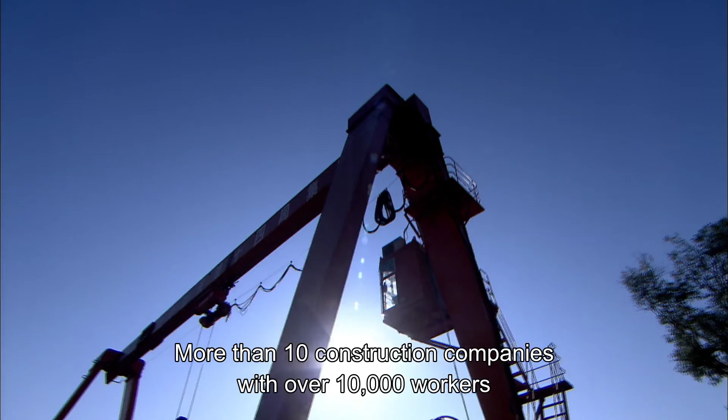In many cities around the world, a subway network will take close to a century to complete. But Beijing's goal is to complete its subway network within 10 years. How are they going to take on this mega project? More than 10 construction companies with over 10,000 workers are working their excavators around the clock. In 2011 alone, 7 new subway lines were being constructed at the same time.

But digging tunnels hundreds of kilometers in length and building hundreds of new subway stations at the same time is not going to be easy. In many big cities, the subway system usually predates the city or grows with it. This gives the subway system a lot of room to develop. But the city of Beijing went from being an ancient city hundreds of years old to a modern megalopolis. There is an intricate network of underground pipes and building foundations underneath the city. Constructing a huge subway network through all of this is going to be a real challenge.

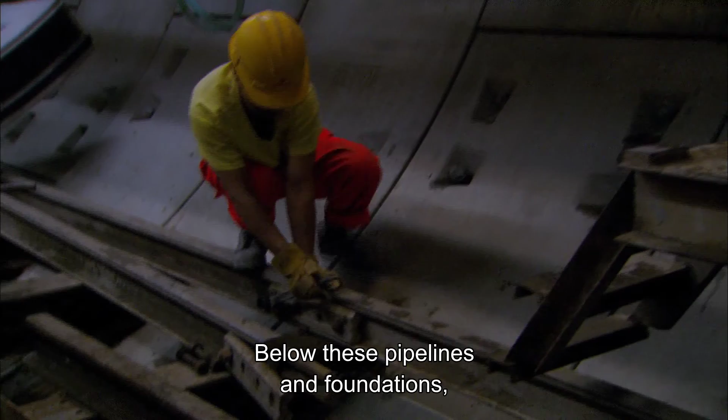Below these pipelines and foundations, workers are building a new subway line. This line will run from east to west, straight through the center of Beijing. This presents an interesting problem for the architects. The most important thing to consider is the fact that there are many ancient foundations below ground. Beijing is an ancient city. The historical streets and quaint alleyways of the city have been revamped with new sights and sounds. For the average tourist, this is old Beijing at its most authentic. The new subway line will be built right under here. How are the engineers going to deal with these fragile old buildings?

Originally, the 6th line was supposed to pass through the imperial city in the center. But after considering the opinions of experts, we've decided to shift the subway line north by 1.5 kilometers. This is so as to preserve the imperial city. But adjusting one part of a subway line alone is not enough to ensure the safety of these ancient buildings. The construction methods used in this project play an important factor too.

This is the biggest department involved in designing the Beijing subway. The architects are discussing how to construct the subway through the old city. Once a subway line is planned, the architects will spend 3 years here working out the minute details of the line. Then, the new line will move to its construction phase, which can take up to 4 years. Their work will only come into fruition in the future. It takes almost 10 years of work for them to see any results. If you ride a newly opened subway line in 2012, it will most likely have been designed in 2005.

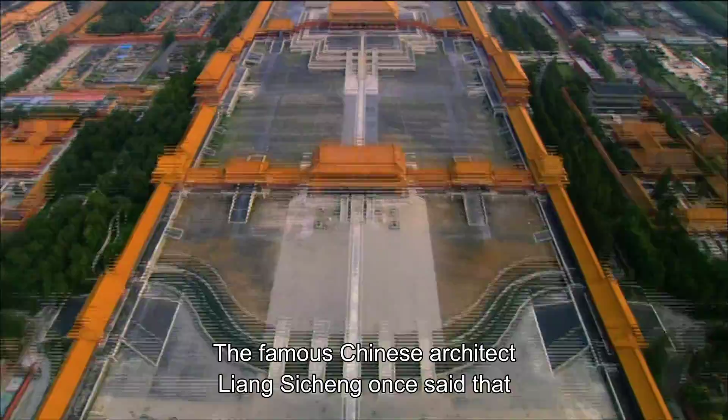Beijing used to be an imperial city. The Yongdingmen and the Drum Tower form a central axis on which the city is strictly planned, reflecting the strict authority of imperial power. The famous Chinese architect Liang Sicheng once said that Beijing's regal beauty comes from its adherence to this axis.

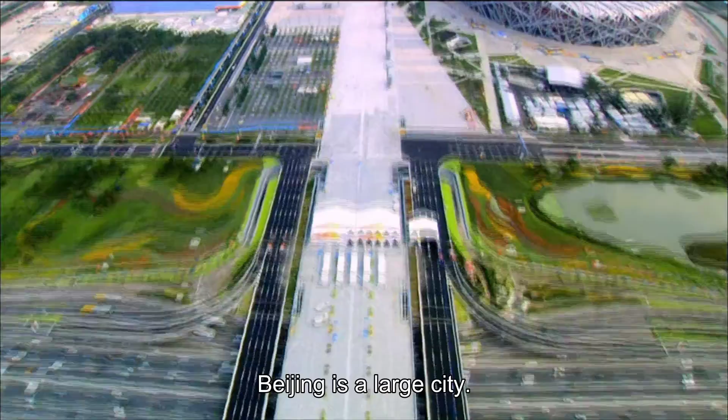Today's Beijing has developed along this structure. It is because the city came before the subway system that the subway is forced to adapt to the city structure. Beijing is a large city. It is very dense too. The subway system must therefore adapt to the way the city has developed, so that it resembles the way the roads are laid out. It basically follows the line of the grid system and the ring roads that surround the city.

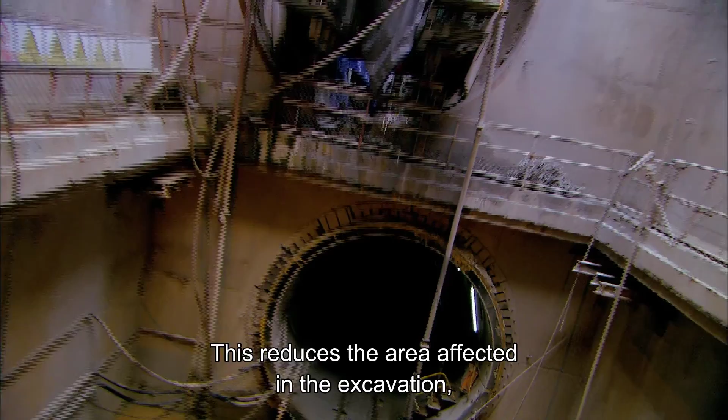In order to better protect the ancient buildings above, the architects have chosen to use a system never before seen in Beijing. When the tunnel diggers run into the ancient foundations of buildings, the tunnels will run on top of one another instead of parallel to each other. This reduces the area affected in the excavation, thus reducing the impact on these ancient foundations. The tunnels are now able to pass through these historical areas safely.

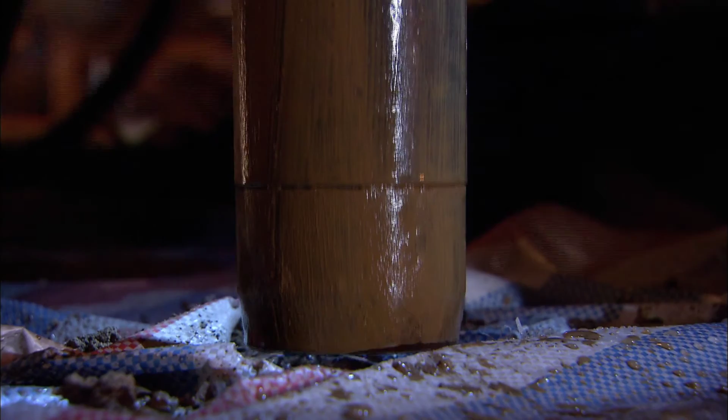On top of this, there is another more important factor to consider: Beijing's soil. In many other places, soil conditions have caused collapses during subway construction. To prevent this from happening in Beijing, the engineers have to study the soil in the city. The soil surveying team works at night to avoid holding up traffic. They are surveying the soil for the new subway lines. They will have to drill a hole 40 meters deep every 50 meters to collect soil samples for analysis back at the laboratory.

Things are going pretty well tonight. The team has successfully extracted their first soil sample, but a large part of the night has gone by, and they still have another 299 holes left to dig. Although this work is tiring and time-consuming, it is absolutely necessary. It provides important reference data for the planning and construction of the subway line.

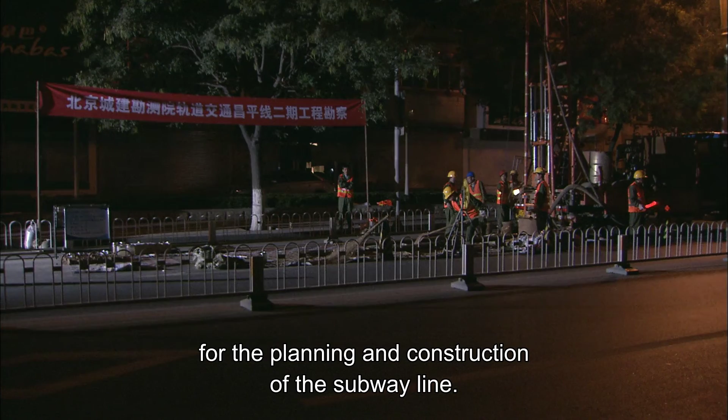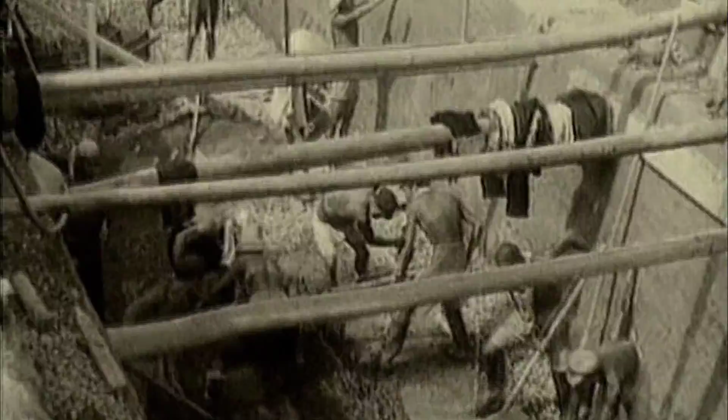In the early 1960s, construction began on the Beijing subway, the first subway system in China. At that time, there weren't many buildings above ground, and the subway line was entirely located 10 meters underground. The tunnels were dug in an open pit entirely by manual labor. No excavators were used at all. This speed of construction would be unacceptable today. Beijing is no longer the city it used to be. Globalization has imposed high standards on the city. The increasingly dense cityscape and congested roads make it absolutely necessary that the subway is constructed quickly.

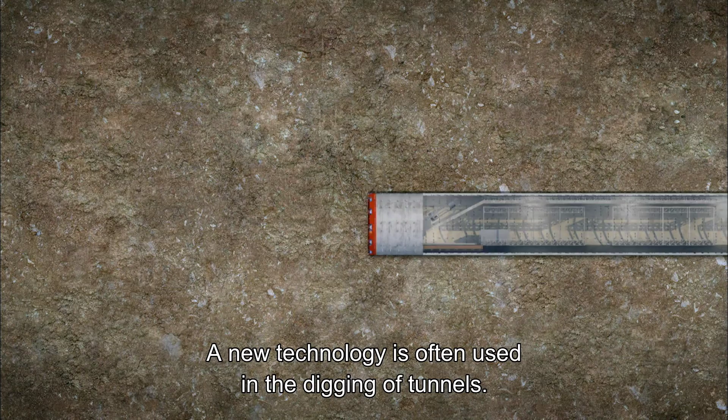A new technology is often used in the digging of tunnels. This machine is many times faster than manual labor. This is the tunnel boring machine. A rotating cutting wheel is located at the front end of the machine. It sends the excavated soil to a chamber where the soil is mixed with slurry. The mixture is then sent to the back where it is disposed by carriage.

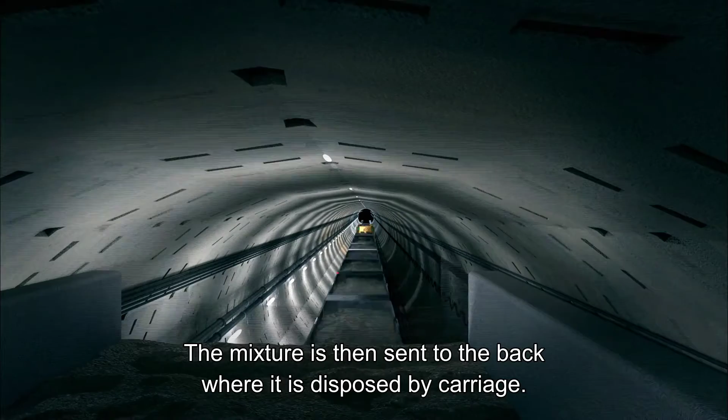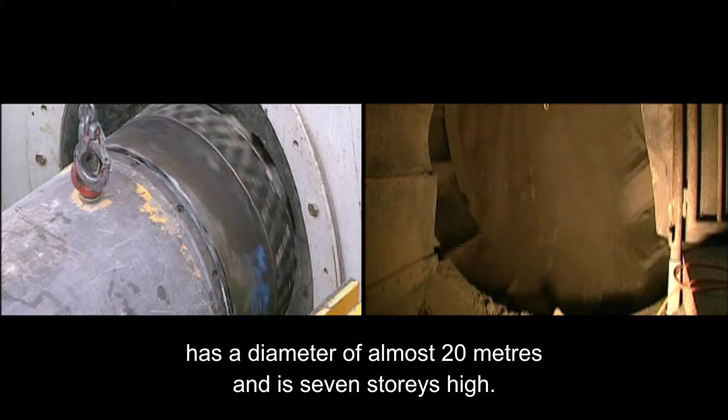The tunnel boring machine is the best machine to excavate tunnels. It is known not only for its speed, but also the size of its cutter head. The biggest tunnel boring machine in the world has a diameter of almost 20 meters and is 7 stories high. Naturally, it is not an easy task to get such a gargantuan machine underground.

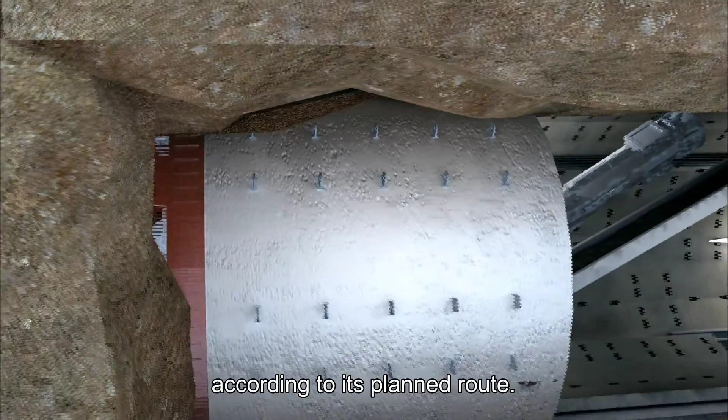Ruixuan Gao is the fastest tunnel boring machine operator in China. His job is to operate the machine continuously 13 hours a day according to its planned route. There is no room for mistakes. This is a complex and tedious job. All I do every day is sit in the control room of the tunnel boring machine. The room is about 1.2 square meters. The only sound I hear is the rumble of the digging. It gets really stuffy in here.

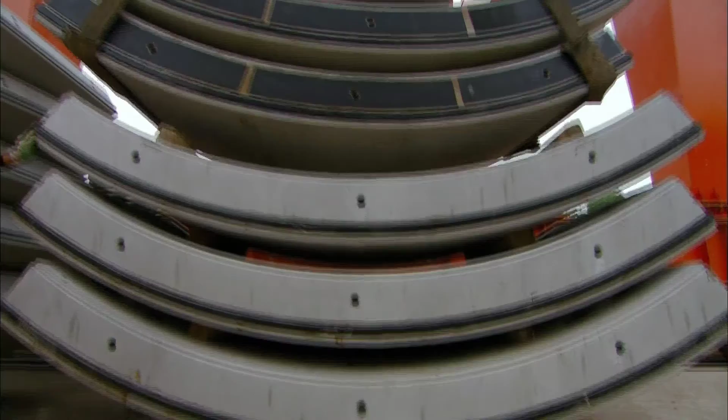Because I spend 12 to 13 hours underground every day, sometimes I don't get to see the sun at all for months. Around me, nothing changes. The only way I know that I'm moving forward is by pushing buttons and seeing the numbers move. The only time Ruixuan Gao gets to rest is when the workers connect the tunnel lining. Every 1.2 meters, the machine will stop so that the workers can install the tunnel walls.

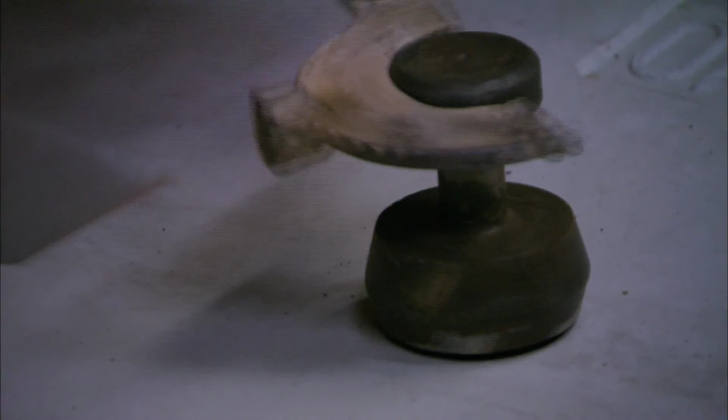There are usually 6 segments to the tunnel wall. These segments differ in size and have different connecting points. The workers have to carefully piece them together to ensure that they fit snugly with each other. As the tunnel boring machine moves forward, the wall of the tunnel is completed at the same time.

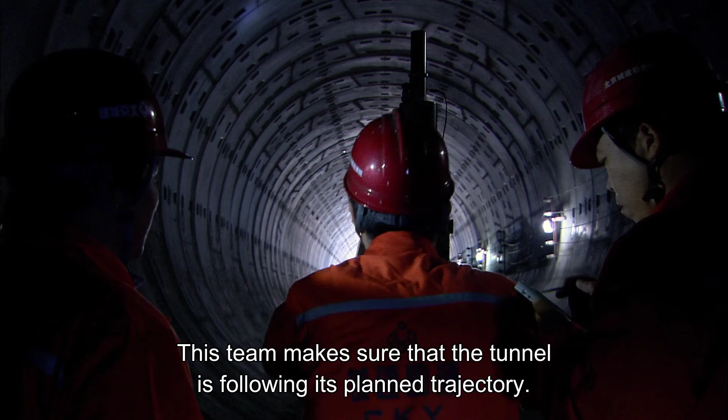When the wall of the tunnel is finished, another team begins its job. This team makes sure that the tunnel is following its planned trajectory. This is important in making sure that the tunnel boring machine emerges at the right place.

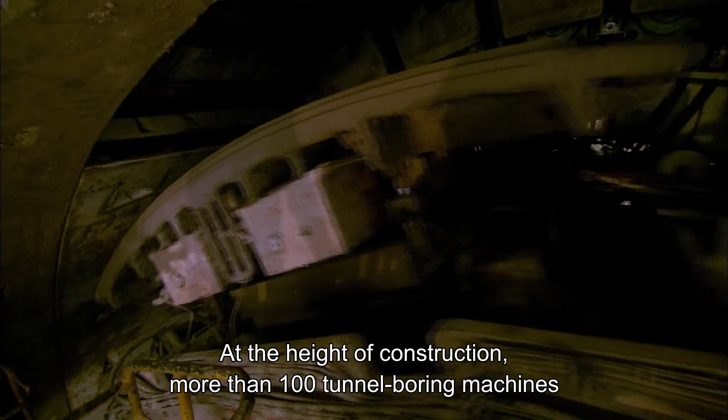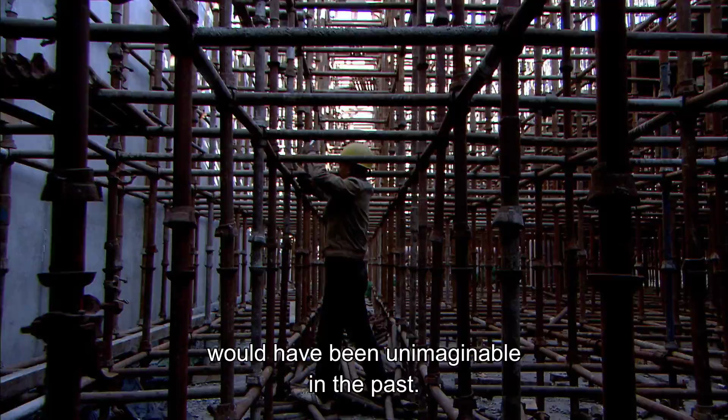The tunnel boring machine is necessary to ensure the largest subway network ever built is finished in 10 years. At the height of construction, more than 100 tunnel boring machines are working underground at any one time. Each one of these machines costs 50 million yuan. Each kilometer of the tunnel costs 1 billion yuan to build. The entire subway network will span over 1,000 kilometers. The costs involved in its construction would have been unimaginable in the past. China's rapid economic development in the past 30 years has allowed Beijing to undertake a mega project like this.

Beijing is developing at an astonishing pace. Its traffic situation, though, leaves much to be desired. As the roads get more and more congested every day, bad traffic is becoming a major problem in people's lives. The city planners of Beijing need to step up their game.

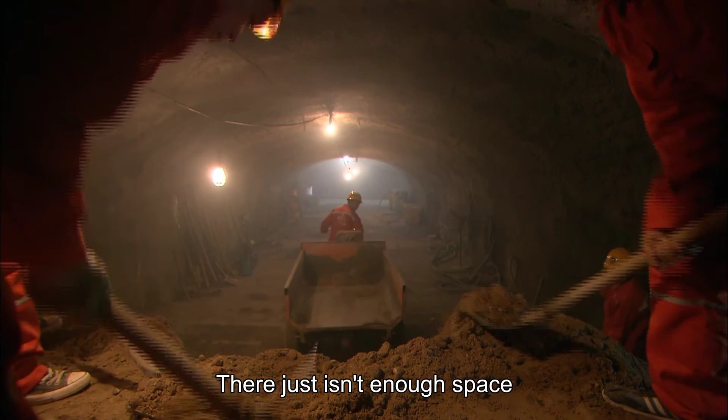The tunnel section near Military Museum Station on Line 9 is still being dug the old way, by manual labor. It takes 18 months for the workers to construct 1 kilometer of tunnel. The tunnel boring machine would have only taken 3 months, but this can't be helped. There just isn't enough space for the tunnel boring machine to go underground here.

The newly constructed Military Museum Station is located along the busiest section of Chang'an Avenue. A huge pit would have to be excavated for the tunnel boring machine to go underground. This would have been impossible on a busy road like this. Line 9 is scheduled to open at the end of 2012. The only way for this to happen is for the workers to work faster.

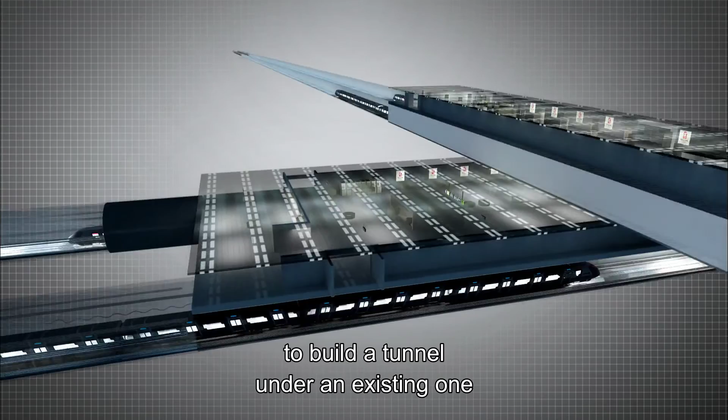There is yet another problem to be solved here. Line 9 has to cross under the existing Line 1. In subway construction, to build a tunnel under an existing one is the most dangerous thing to do. However, this is not the only problem for this new station.

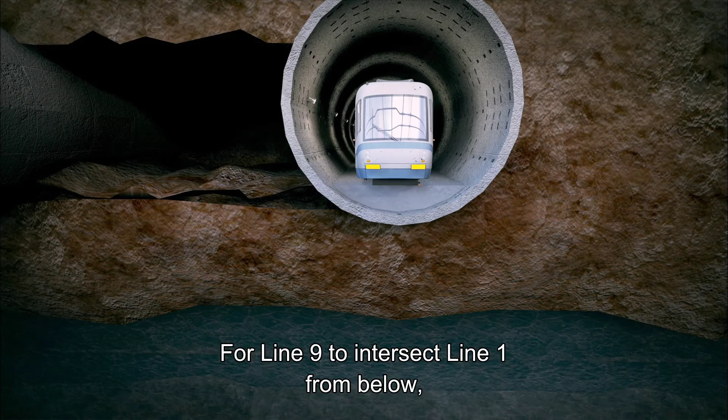Under the new subway plan, Line 9 will intersect with Line 1 with a new Military Museum Station serving as an interchange station. Line 1 was built close to the surface, and so the new line will have to be built under it. But the problem is that under Line 1 there is a large layer of water. For Line 9 to intersect Line 1 from below, the new station would have to be built in this layer of water.

It's a nightmare to carry out construction in an underground body of water. The water could lead to collapses any time. The workers will have to drain this water before they can begin work. It takes 2 whole months to drain the water. When the workers examine the water level again, they discover that it has not dropped significantly. This adds another level of difficulty to an already difficult project.

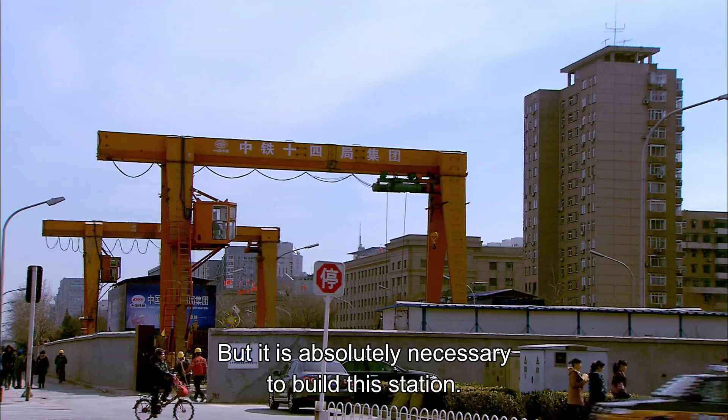But it is absolutely necessary to build this station. 1 kilometer away from it is the largest railway station in Asia, Beijing West Station. The volume of passengers it receives per day is one of the biggest in China. However, not a single subway line goes to this station. Because of this, it has long been one of the most congested areas in the city.

The Military Museum Station on Line 9 will connect with the Beijing West Station, allowing passengers to also change to other lines. This will help to ease congestion around the Beijing West Station. But there still doesn't seem to be a solution for the Military Museum Station. The engineers are stumped.

At the other end of the city, the tunnel boring machine operator Wu Xuangao has also run into a problem. The tunnel boring machine has to face a new challenge. The longest time we've spent down here is 26 hours. We've only bored 10 centimeters so far. The reason the boring machine lost its power lies in the complex soil structure of Beijing.

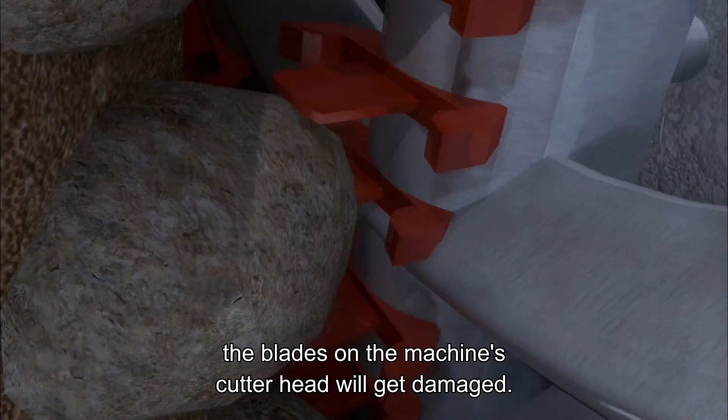The east and west ends of Beijing are slightly elevated. Because of the sediments deposited by the rivers, the soil on the east side of Beijing is sandy, while that on the west side is rocky. Tunnel boring machines do not deal well with hard, rocky soil. The big boulders in the soil turn along with the machine's cutter head, making it impossible for the machine to advance forward. If forced to push forward, the blades on the machine's cutter head will get damaged. The soil structure is a problem for tunnel boring machines around the world.

As traffic gets worse every day, the pressure to finish the project on time weighs down on everyone. This means that Wu Xuangao is forced to stay in the tunnel for even longer periods of time. Every moment underground now frays his nerves. Every time I go in there, I get so annoyed. Every time I hear the rumble of the machine, I ask myself, what am I doing in here? Why don't I just pack up my stuff and go home?

At 5 o'clock in the morning, the first subway trains leave the depot after making their preparations. They are getting ready to set out on their day ahead. A new day has begun. The subway trains begin their 18-hour workday.

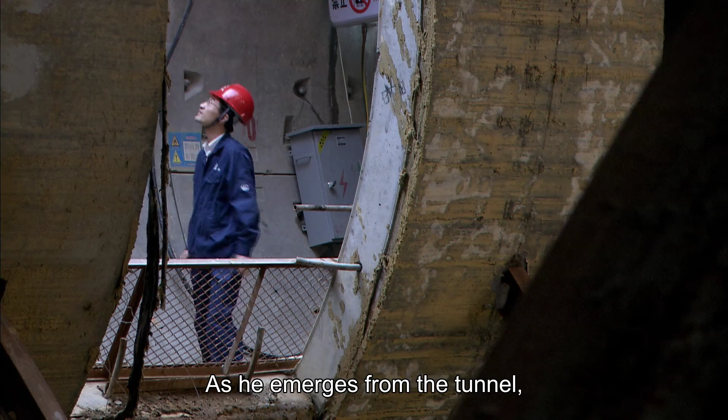Only now does Wu Xuangao get off work and see the light of day. As he emerges from the tunnel, he realizes that the moment he walks out of the tunnel every morning is the happiest moment of his day. He receives texts from his friends and family from far away and feels the first rays of the morning sun on his face.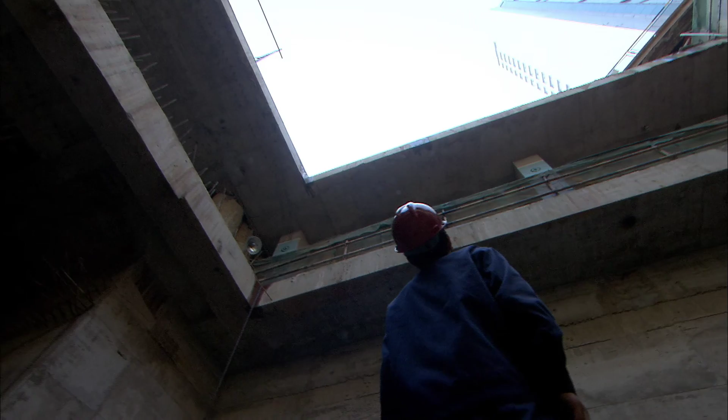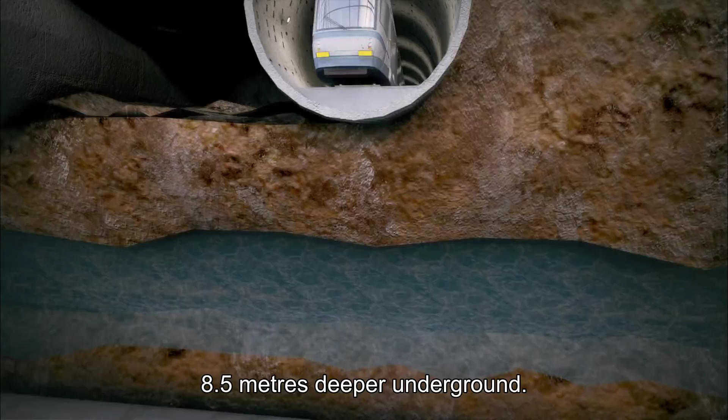After many rounds of discussion, the experts finally come up with a bold solution for the military museum station. 8.5 meters deeper. They have decided to move the new station 8.5 meters deeper underground. They will now bore deeper to build the new station below the body of water.

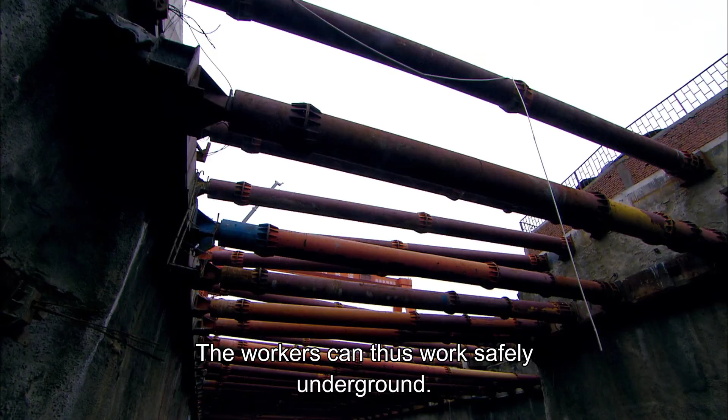There are two ways of constructing the tunnels for the subway: the trench method and the trenchless method. The trench method requires many steel beams for support. The workers can thus work safely underground. But the drawback to this method is that it generates widespread disruption on the surface level. Because the subway lines run close to the road system, using the trench method would only paralyze Beijing's traffic further.

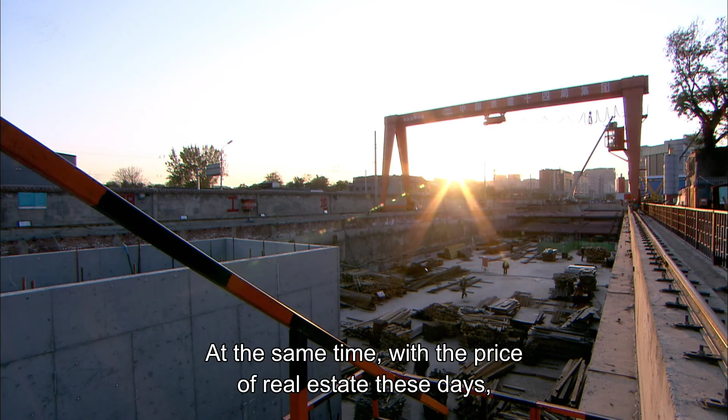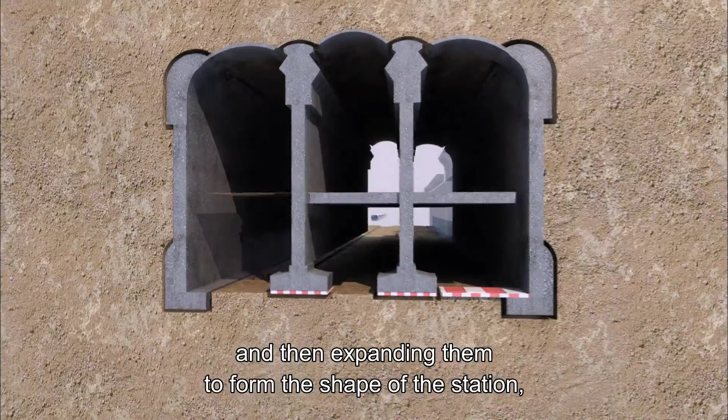At the same time, with the price of real estate these days, removing and transporting soil would cost an astronomical amount of money. So in light of this, a new method was invented. This new method is called the trenchless method. It involves boring a few small tunnels underground and then expanding them to form the shape of the station, then getting rid of any unnecessary soil in between. This entire process takes place underground, minimizing surface level disruption.

This is the perfect solution for the military museum station. This method is more difficult and more time-consuming than the trench method, but it is the only solution now. First, a vertical well is drilled deep into the ground. Above them is the layer of water that cannot be drained.

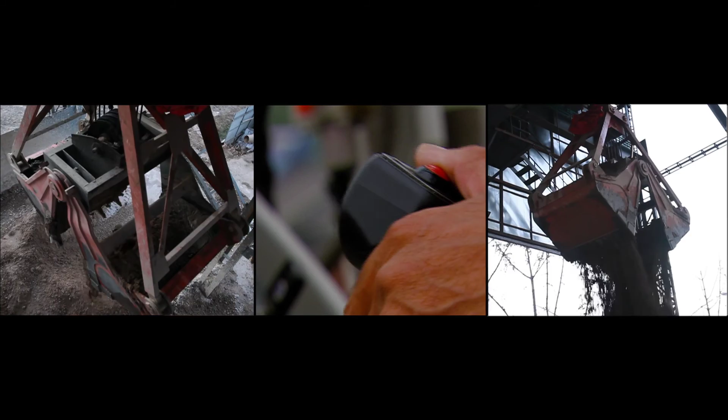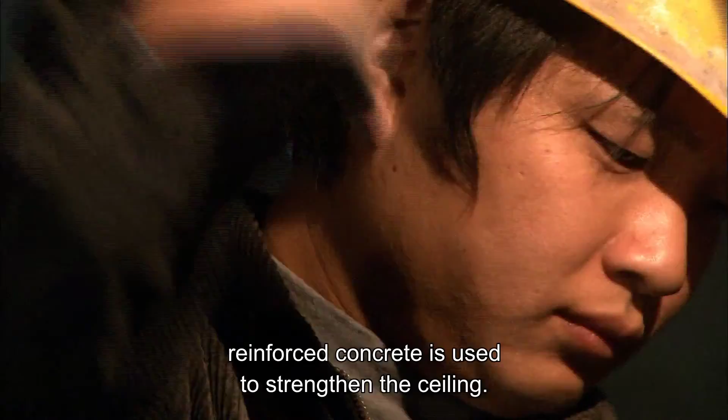There are only 3 meters of ground between them and the water. The engineers need to make sure that this layer of ground doesn't collapse or leak. At every step of the way, reinforced concrete is used to strengthen the ceiling. This will ensure that the workers stay safe. But there is one more factor the engineers need to keep in mind. The subsidence of the ground must not exceed 3 millimeters.

There are strict requirements put in place for the distance between train and tracks. If the ground sinks more than 3 millimeters, the tracks will warp in shape. The trains will then have to reduce their speed when going over these deformed tracks, making the coordination of these intersecting lines a huge mess. 3 millimeters might seem small compared to a project of this scale, but the subway engineers need to always keep this number in mind, because above them lies a 50-year-old subway line, Line 1.

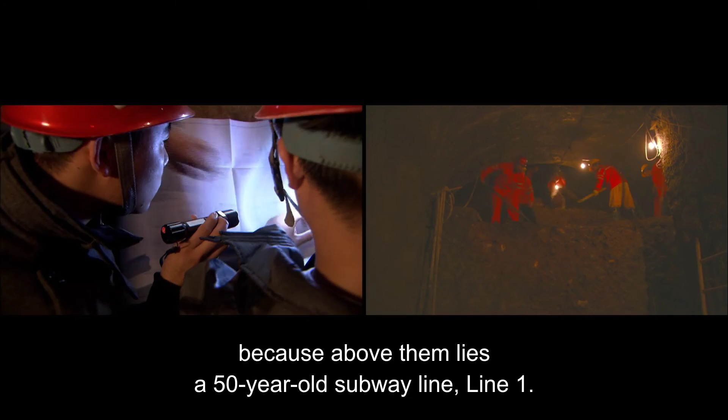Line 1 was the very first subway line in Beijing. Today, it is one of the main transport lines of the city. Over 1 million commuters use this line every day. Above this line is Chang'an Avenue, in the middle of which is Tiananmen Square, the heart of Beijing and a special symbol for the people of the city. There are several stations east and west of Tiananmen on Line 1. On public holidays, this line gets incredibly crowded. But this line started its life as an asset for civil defense.

In the early days of the People's Republic, people either got around Beijing by foot or by rickshaw. The premier at the time, Zhou Enlai, once said that 200 buses is enough to provide transportation for the entire city. The Beijing subway only came into existence because China needed to prepare for war. The Moscow Metro played a big part in the Soviet Union's defense during the Second World War. This inspired the newly formed People's Republic. After 10 years of planning, in 1965, Beijing started construction on the first subway system in China.

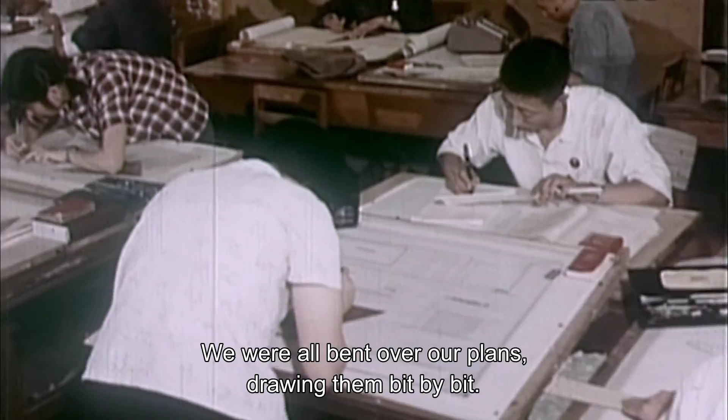But the construction of the subway was arduous and fraught with difficulties. We designed the whole subway system in less than half a year. We were so nervous at the time because we had no experience in this and nobody to learn from. We just decided to do it on our own. We were all bent over our plans, drawing them bit by bit. That was during the summer, I remember. It was really hot. We were so afraid that the sweat from our elbows would smudge our plans, so we put towels underneath and continued drawing.

After 4 years of work, Line 1 began operations in 1969. Because the subway was meant primarily for military transport at the time, Line 1 wasn't open to the public. Only invited guests could ride it. It was a much simpler time. The subway stations were known as underground palaces. To build this subway, to build the first subway in China, we worked really hard. I'm very proud of what I've done. Very proud.

Meanwhile, construction on the Metro Museum station is taking place right underneath. A special method is being used to prevent the subsidence of Line 1. This method was used in the construction of the London Underground 20 years before. It prevented Big Ben from leaning on its side.

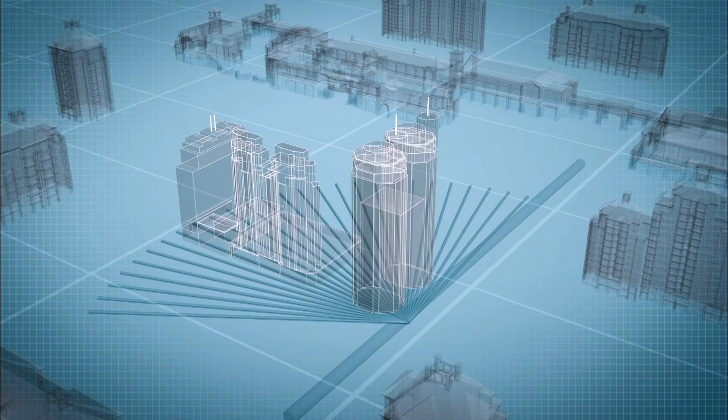If any part of the ground shows signs of subsidence during the building of the tunnel, steel pipes will be inserted to support the ground. Cement will then be pumped through these pipes into the ground to make it more sturdy. Although this helps to mitigate the risks, such a large-scale operation still has its dangers.

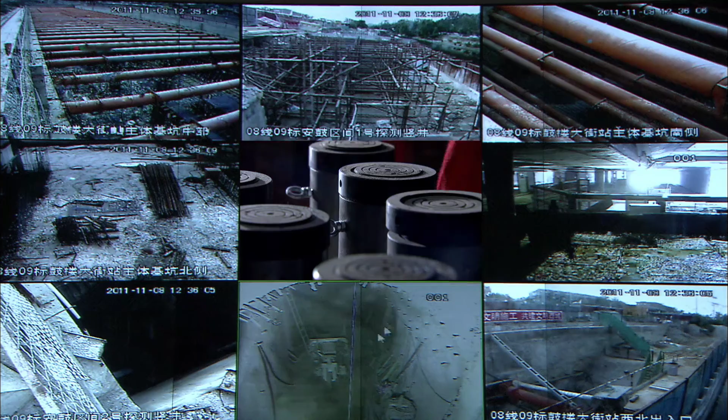Every day, reports on the construction's progress will be sent here. A dedicated team is set in place to monitor the entire construction in real time. Not one problem escapes their eyes. Workers at another line are facing the same problem of building a new line underneath a pre-existing one, but they have decided to use a different method to deal with this.

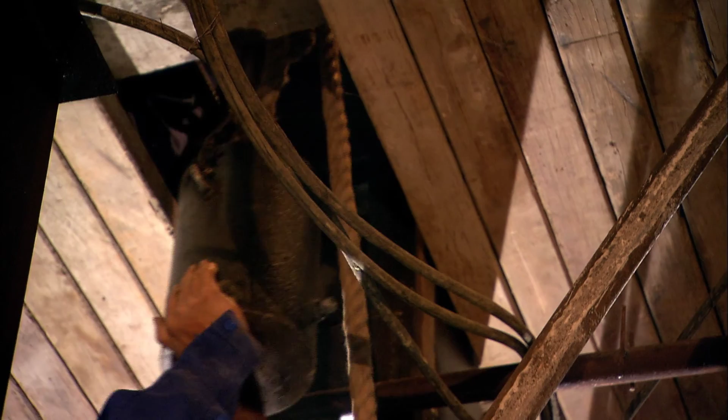This is another station where a new line will intersect an old line. The only difference is that between the two stations, there is neither a layer of water nor ground. They are built close to each other. Right now we're standing in the new Line 10, which is undergoing construction. The steel beams are supporting a concrete base on the ceiling. On top of this base is the operational Line 1.

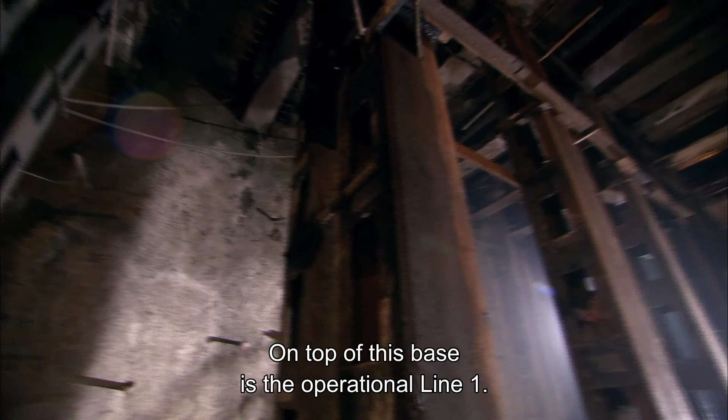Underneath this 40-year-old station, a void is being excavated to make way for the new station. The workers need to make sure there are no disruptions to the operations above and that the ground doesn't sink more than 3 millimeters. Almost everyone involved thinks this is impossible, but engineer Hao believes it will work. His secret weapon is the jack post.

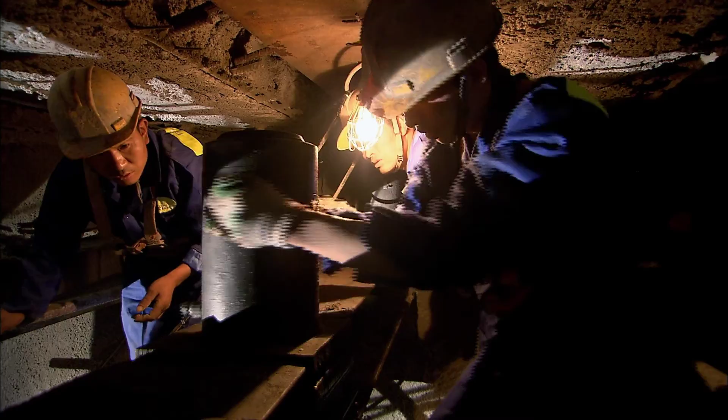Every steel beam is fitted with a jack post on top. It supports the base structure above it. The jack posts are placed on the load-bearing walls and support beams of the new station. They will end up being wedged between the two stations. These jack posts can weigh from 30 kilograms to 90 kilograms. They can bear weight up to 1,600 times their own weight.

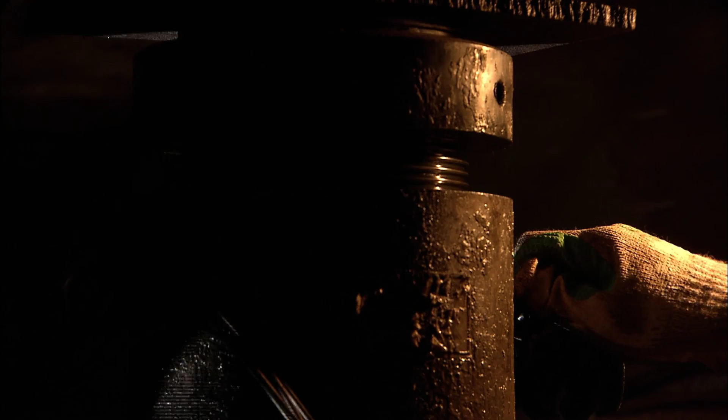The position of each jack post is precisely calculated. They can each be carefully adjusted through a hydraulic cylinder to compensate for any subsidence in the ground. As construction moves forward, the engineers monitor the subsidence of the ground closely. The moment it gets close to 3 millimeters, the workers will increase the pressure on the jack posts. As Rixuan Gao frets over the slowness of the tunnel boring machine, experts are trying to find ways to continue the boring process.

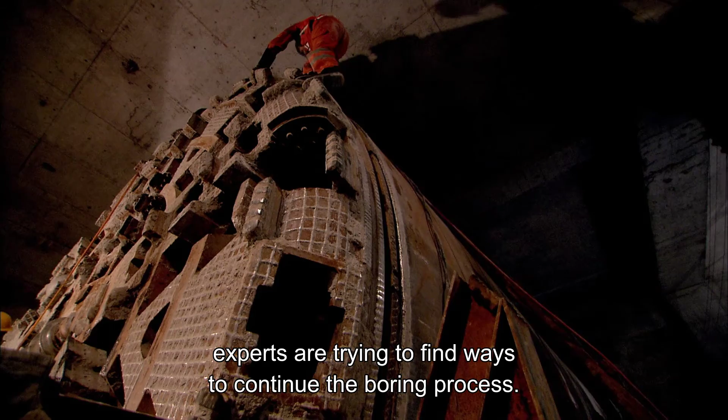This is the second rush hour in Beijing, and it is worse than the first. The average time spent on the road at this time is 2 hours. The subway system during this time is incredibly crowded. Line 5 has 800,000 commuters a day. It is fast approaching its projected ridership numbers for 2031. Traffic congestion is slowly spreading from the city center to its periphery. The road system of Beijing is getting seriously congested.

Beijing's social cohesion and abundant resources are drawing scores of foreigners into the city. There is a large immigrant population here. According to the 6th census, there are close to 20 million residents in Beijing, out of which 7 million are people who are not natively born. 1 in every 3 people here is not a native Beijinger. I collect data for maps. Every day I go all around Beijing collecting data to update existing maps.

Almost every city in China incorporates Chinese tradition in its design. This is especially pronounced in the capital, Beijing. The city is growing vertically day by day, but it is also expanding outwards from a center. Beijing is developing so rapidly. A place that was an empty field just a while ago can suddenly become a skyscraper. In order to include more data about the city in our maps, we have to make our scale smaller and smaller.

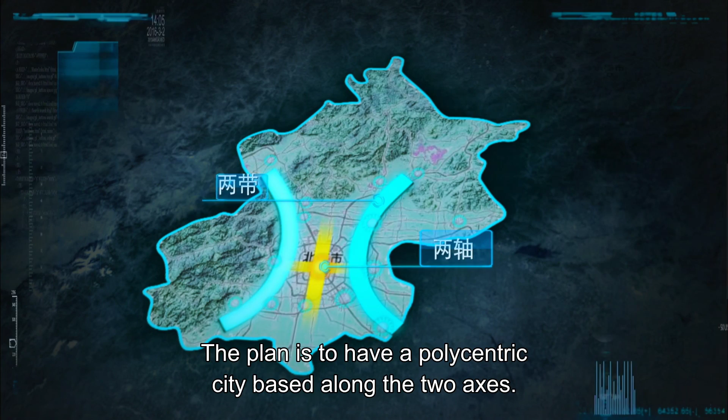A new city plan is being laid out in Beijing. The central axis and Chang'an Avenue form a cross that will act as the core of its new development. At the same time, new centers will be set up in the east and west parts of the city, with new service areas in these districts. The plan is to have a polycentric city based along the two axes.

But Beijing's old city plan has been in existence for a long time. The ring roads surrounding the city have also set its structure in place. The only way to challenge the old city structure is to have a robust rail system.

From the city centre to the new outlying centres, we need to establish express railway systems. The only way to develop these outlying centres is to provide railway access to the city. These new centres will then develop around the train stations along the way. More and more lines are being built to service the outskirts of the city. This is easing the pressure on the city center.

By 2020, the subway network will cover over 1,000 kilometers. This is equivalent to the distance between Beijing and Shanghai. And these rail lines will all be located underground. But will the increasingly dense city accommodate the subway?

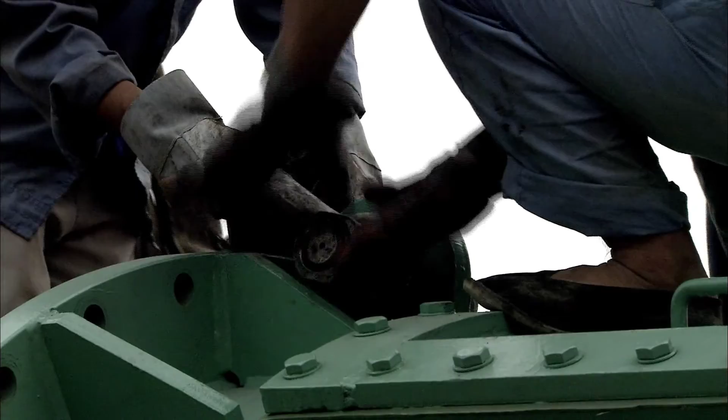This 45-ton, 16-meter-long steel object is a component of a machine. Workers at the Line 14 construction site are assembling China's biggest tunnel boring machine. It has a diameter of 10 meters and is as tall as a 3-story building.

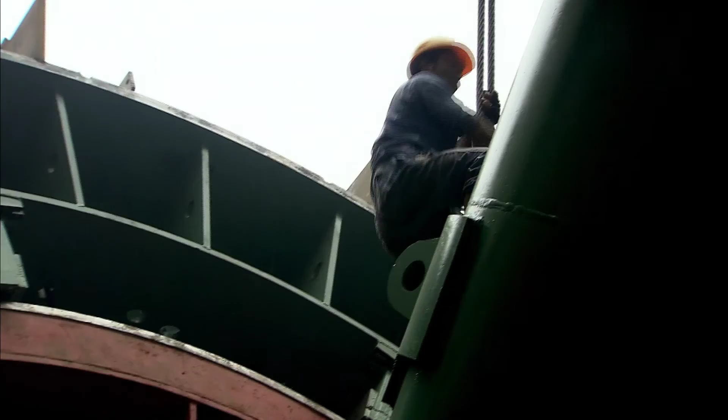For such a big machine to go underground is no easy task at all. All tunnel boring machines have to be dismantled on the ground and reassembled underground from their constituent parts. The size of this machine just means that more time will be spent doing this task. After 6 months, the assembled and tested machine finally begins its work.

Behind the machine is a tunnel with a diameter of 10 meters. Instead of being a traditional single-carriage tunnel, this tunnel can accommodate 2 trains side by side at the same time. This saves precious underground space.

The Beijing subway no longer has just one line. It is now a complex subway network that covers the entire city. With time, this network will only grow bigger. We have reason to believe that this will make the average commute much shorter.

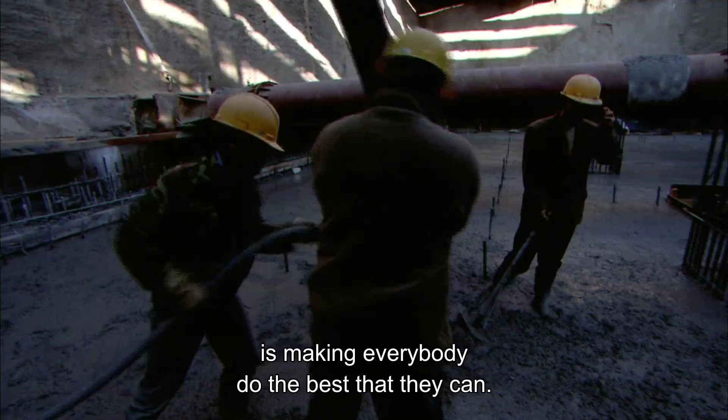In less than 10 years, this massive project will have to be finished. The pressure of time and the pressure from the increasingly congested roads is making everybody do the best that they can. The deadline for the Central Axis Line is fast approaching. The stations on the line are already in their decorating phase. At this moment, the architects are discussing the last details of the plan.

In 2008, the 29th Olympic Games were held in Beijing. 100,000 people gathered in the Beijing National Stadium to watch the opening ceremony. After the ceremony, the sheer amount of people traveling out of the stadium would have caused a huge traffic jam in the city.

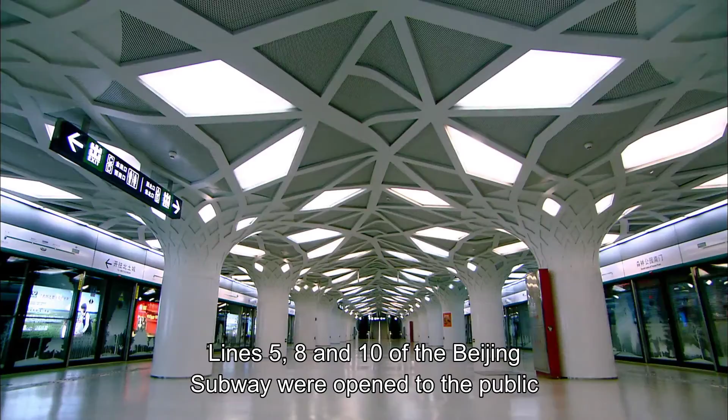Before the opening ceremony, lines 5, 8, and 10 of the Beijing subway were open to the public to better service the Olympic Games. Line 8 is even named the Olympic Branch Line. During this time, the subway system has to sustain an enormous amount of riders, possibly more than it ever has before.

Even then, there is a limit to the number of commuters the subway system can transport. Transporting all the commuters leaving the games is going to be a huge challenge for the subway system. The most viable way is to increase the number of trains to transport all the passengers. Right before the line is about to be open to the public, a new train car is being put to the test. The goal of the test is to reduce the waiting time between trains.

The red light ahead is a signal that the train should not move forward. But this test is to see if it is possible to override this red light. The control room is monitoring the situation closely. At first, the train pushes forward according to its designated speed. A few minutes later, the train approaches the area.

There's a red light. You can run the red light. Run the red light. Copy that. If it is possible to run the red light, it would mean that the computer of the train isn't functioning well. The operators are trying to see if the system allows that. The train is fast approaching the red light.

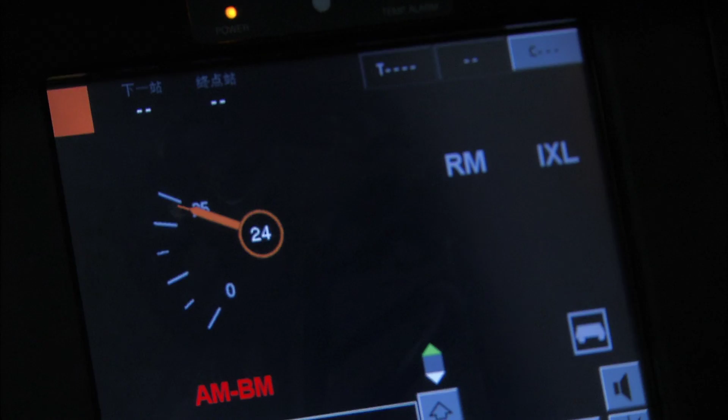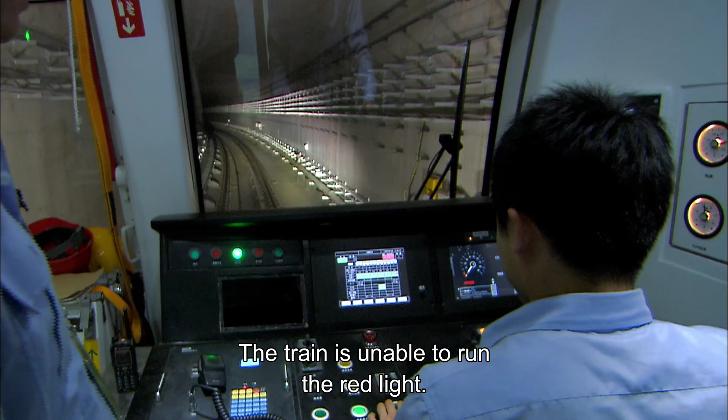The train is unable to run the red light. The system forces the train to stop 2 meters away from the red light, ensuring the train's distance from the train ahead of it. This is the most advanced signal technology. The time between trains has been reduced from 10 minutes to just 3 minutes.

After the closing ceremony, the subway system manages to disperse the 100,000-strong crowd in just 40 minutes. Thanks to its spectacular performance during the Olympic Games, this system has been put in place since then. The waiting time between trains during rush hour has been reduced from 10 minutes to 2.5 minutes. Originally, there were only 6 trains in an hour. Now, 24 trains pass through the station every hour, raising the subway system's transport capability.

The 2008 Olympics hastened the progress of the subway system. It really sped things up. You know, when it comes down to it, I think the city's development is reflected in the needs of its transport system and its subway system as well. It is precisely this urgent need that forces the Beijing subway to quicken its construction speed.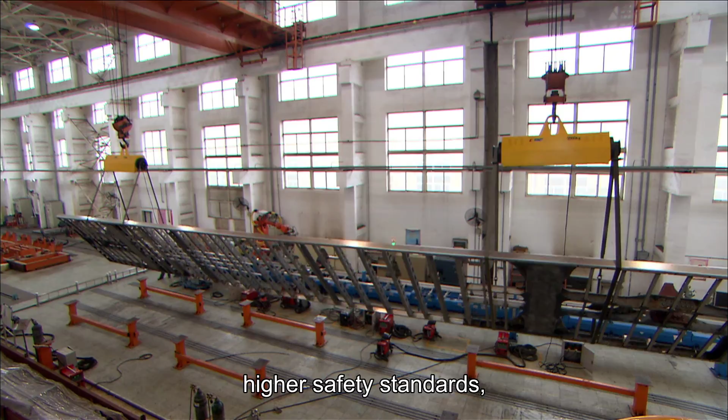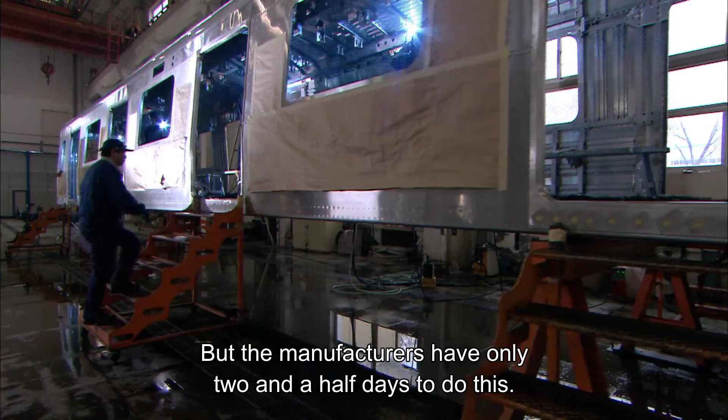As the Beijing subway network expands, new lines are being opened. The greater transport capacity of the subway, higher safety standards, and greater need for comfort in the train make it a challenge for the train manufacturers. New and better train cars are being manufactured. 4,800 components, 50,000 joints, and various types of connecting parts are used to complete this massive operation. But the manufacturers have only 2.5 days to do this. The newly manufactured train cars are fitted and tested within 2 months before joining the fleet.

And yet, the subway is still really crowded. In 2000, 400 million people rode on the Beijing subway. 10 years later, this number has increased to 1.8 billion. The Beijing subway has one of the highest riderships in the world.

During the construction of the new lines, one of the priorities is to reduce the time taken to change trains. Before 2000, most interchange stations were structured like this. These are the tracks and platform for one line, and these are the tracks and platform for another line. Between them both, there are walkways to connect the two stations. Most of these walkways are one-directional. Passengers would get off the train, walk to the entrance of the station, then walk through the walkways to the entrance of this other station. The distance is about 100 meters.

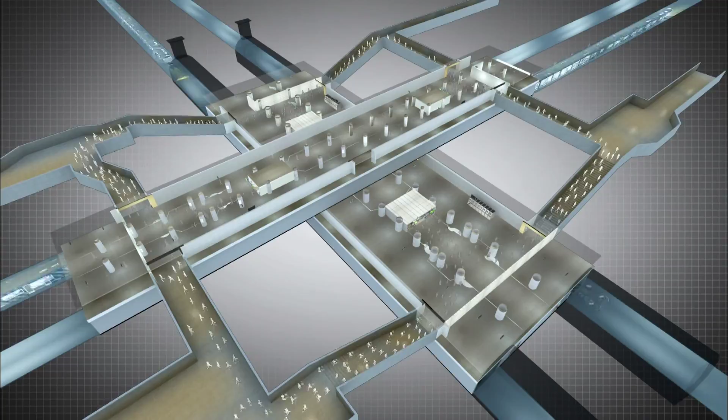The Hong Kong MTR is the easiest subway in the world to change trains. The design of the subway lines allows for passengers to change trains on the same platform. The new lines of the Beijing subway will use this system as well. These are the tracks of one line. This platform will have 2 sides. When we're laying the other line, we'll make it so that it'll pass through the other side of the platform.

Passengers can now change trains by just crossing the platform. They no longer have to get off the platform and walk through the station to get to the other platform. All they have to do now is cross the platform. It'll be a distance of about 10 meters. It'll be very convenient.

Every piece of data passes through this center. This is the command center of the subway. It monitors every single train in every single line. In 2020, when subway ridership reaches another peak, this center will be crucial in coordinating the biggest subway system in the world.

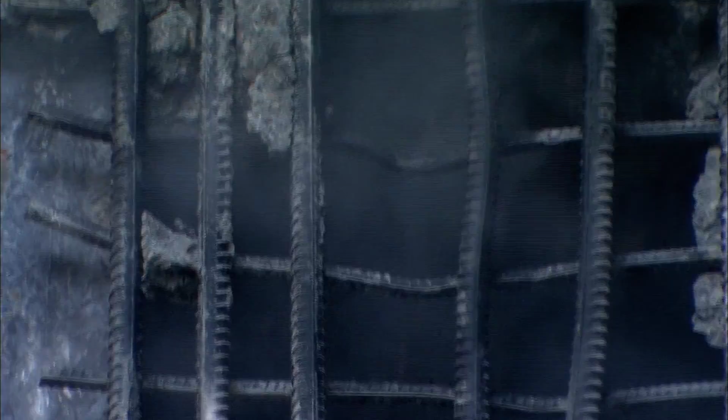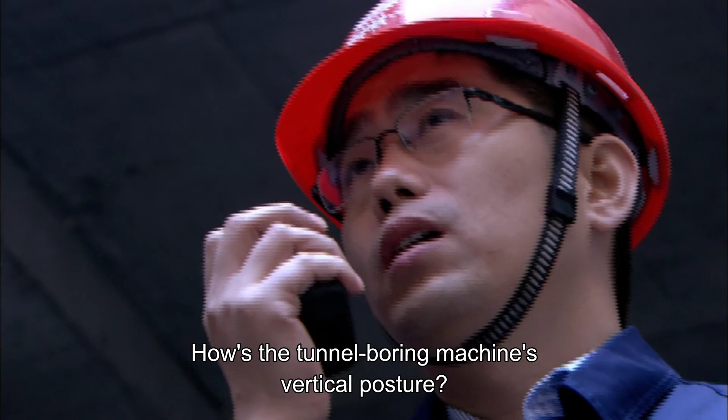Add some lather. If you don't add lather, the steel beam will swing right here. No. It's okay. Is there any water in the cabin? How's the tunnel boring machine's vertical posture? It's boring as per normal now. Only 10 centimeters more and we're through.

Today, the tunnel boring machine that Rushuan Gao is operating will finally come through the other side. What should have taken only 3 months to bore has taken a year due to the soil structure. Finally, the machine is coming out of the earth. This is the most dangerous moment of his job. If the boring machine is slightly off mark, it might not be able to bore through the opening. It might even cause the opening of the tunnel to collapse. Sand and water would then gush out of the earth.

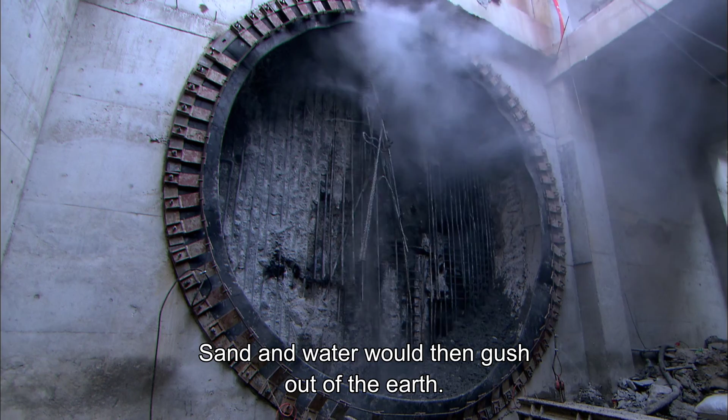Raise the machine a little bit. You need to put more force on the cylinders below. Roger that. To Rushuan Gao, this is the most crucial moment. We can see 2/3 of the cutting head now. It's coming, here it comes. The machine is out of the hole. You may stop moving forward now.

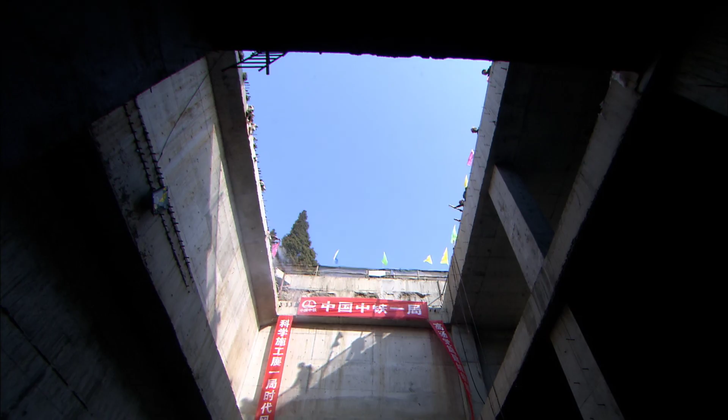After the celebration, Rushuan Gao always walks through the tunnel he just bored. To everyone else, the tunnel never ends. Every part of it looks like the part before. It looks really boring to them, but not for me. I know every single part of this tunnel. I bored the tunnel myself, centimeter by centimeter. When I walk through it, I think of how it was when I was boring certain parts. It makes me think of what I was feeling at the time.

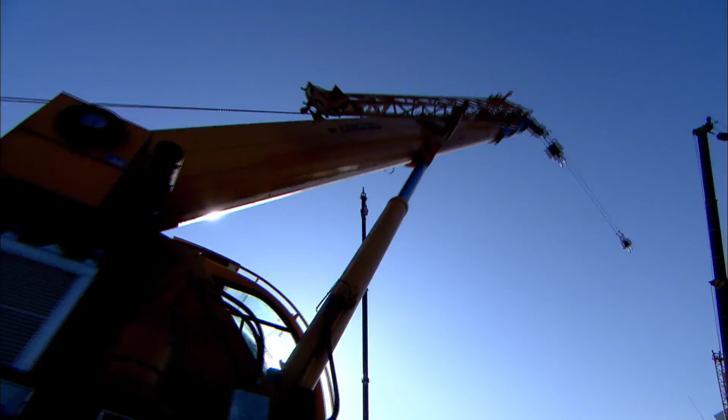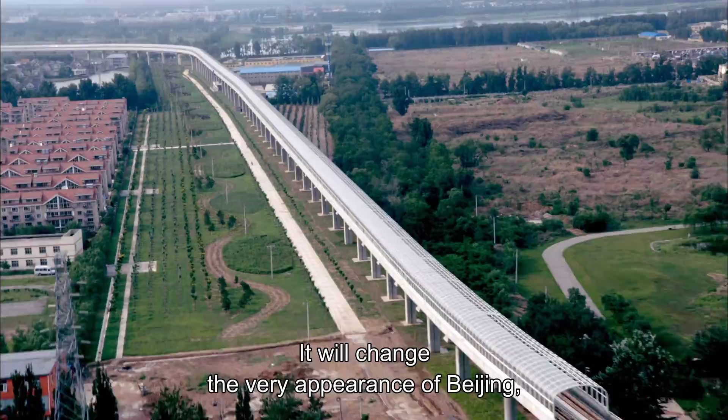This mega project is still ongoing. Thousands of people are still working on it. They pour their sweat into making this engineering miracle so that one day, the world will look at it and be stunned. This day is not far off. In 2020, this vast underground network will give new life to the city. It will change the very appearance of Beijing, marking a new chapter in Chinese history.